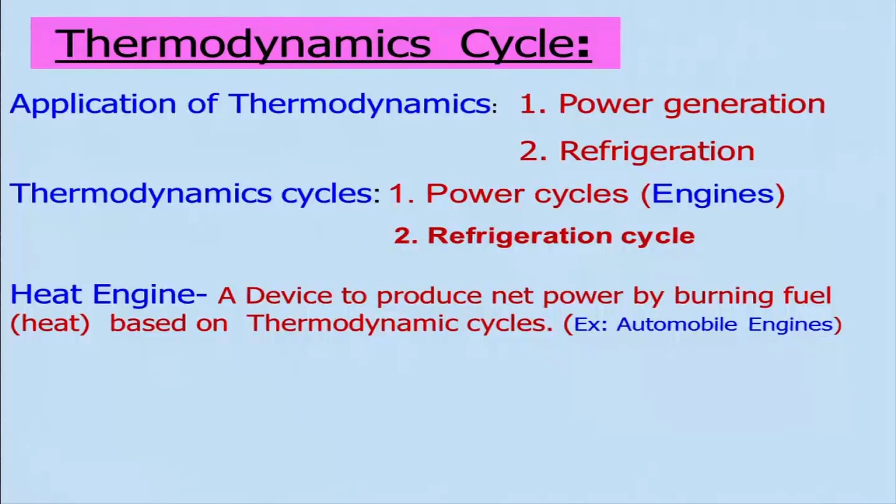These are heat engines, a device to produce net power by burning off fuels - it may be fossil fuel, it may be nuclear kind of fuels. Basically you will be generating heat, and that acts as the driving thing, and this will be best operated on thermodynamic cycles. We are basically considering combustion, that is the burning of fuel, and this combustion can be divided into two categories.

One is the internal combustion engine, the other is external combustion engine.

If you look at your automobile engine, is it an external combustion engine or internal combustion engine? Most of you might be riding your bike, which is powered by a heat engine. So what is that - is it internal combustion engine or external combustion?

What is the meaning of internal combustion engine? It is basically that the combustion or burning of fuel is an integral part of the engine. In an external combustion engine, you can burn some fuel which is not an integral part of the engine, so we call it an external combustion engine.

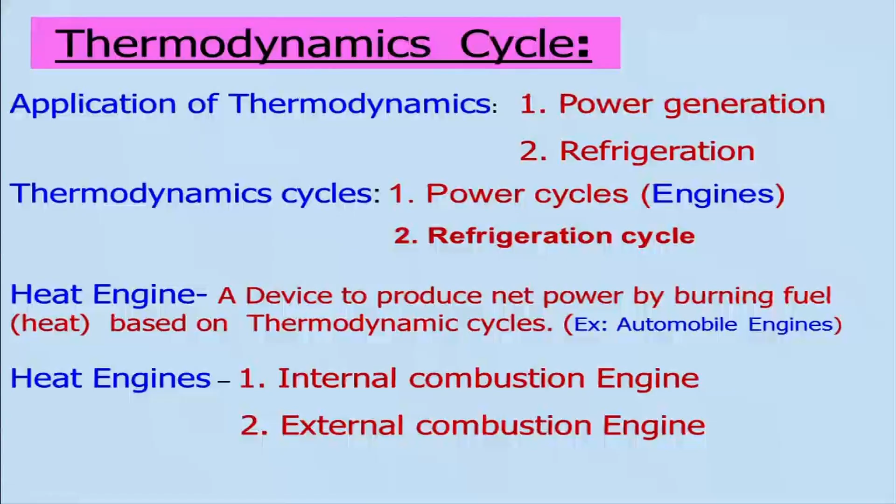If you look at the power cycle which generates power, it is not the cycle itself that generates power, it is the system operated on the thermodynamic cycle that produces the power. Therefore, we are labeling this cycle as a power cycle.

Power cycle can be broadly divided into two categories. One is vapor power cycle. As the name indicates, vapor will be produced in the process; it might be liquid, and then it will be converted into vapor, and again converted back into liquid form.

In another cycle, or heat engine, there is no need to have a phase change process, like gas working on it, as in your automobile engine. We take the fuel, and the liquid fuel is converted to gaseous form, but that is not quite the case here. You will be burning the fuel mixed with air, and working on that. We will be discussing the gas power cycle in detail, but now we will be discussing the vapor power cycle today.

When you talk about this power cycle, it can be broadly categorized into two again, based on whether it is a closed cycle or open cycle.

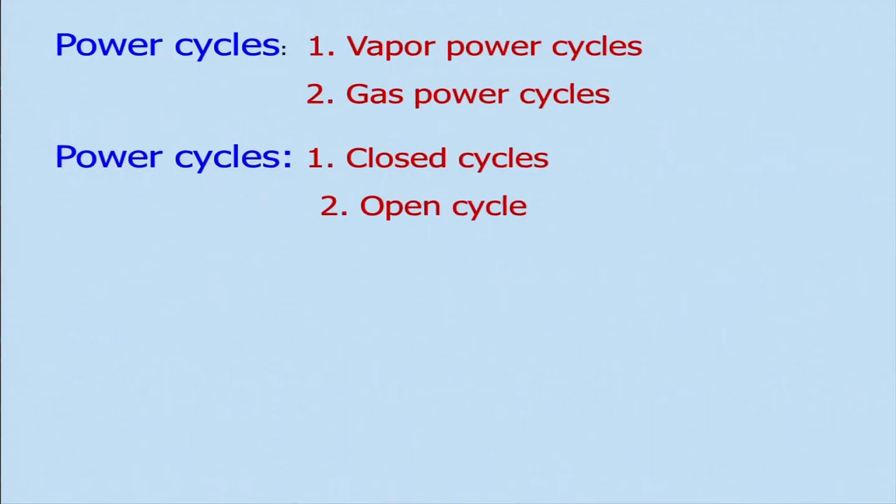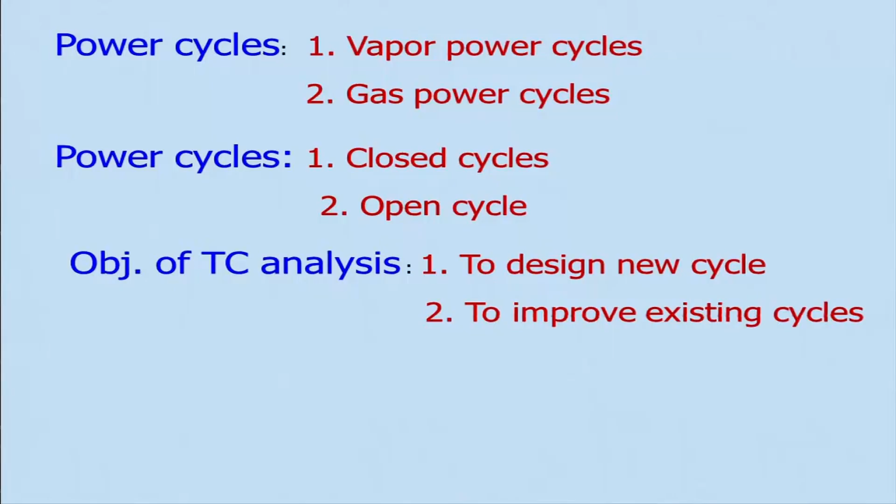We need to discuss those things, and our objective is to analyze the thermodynamic cycle in twofold. One is to design a new cycle, suppose I am not happy with the cycle and want to improve that, or another is to improve the existing cycles, because as we had seen in the last few lectures, we are interested to find out second law efficiency to identify irreversibilities, so that we pinpoint those things and try to minimize the irreversibility, so we can improve the efficiency of a system, an engine or a refrigerator or any other thing.

As I told, the main interest in thermodynamic cycles is to determine the thermal efficiency, because that will tell you how good the cycle is, or how good the engine or refrigeration system is. We will also need to look at other performance parameters, like second law efficiency we saw in the last lecture, so we know to what extent we can achieve performance. Otherwise you may be thinking you want to achieve something but it is not possible, so you should know the limit.

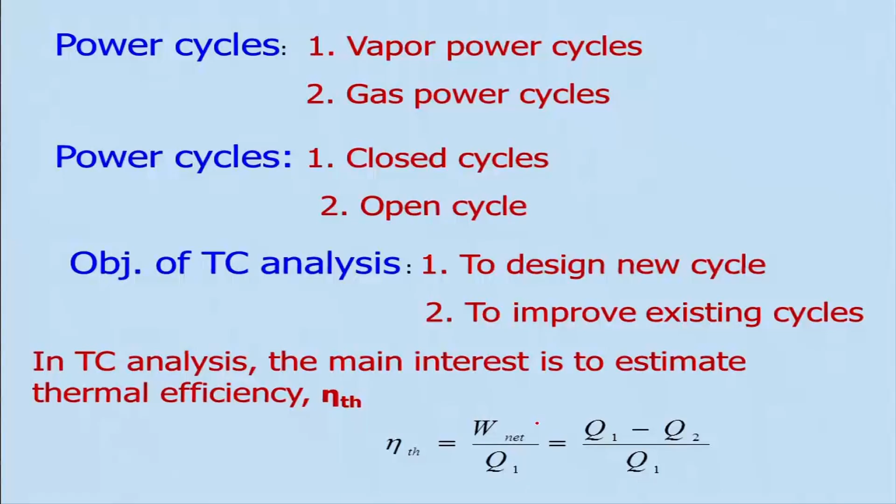The thermal efficiency is basically the net work output divided by Q-in, Q1. Q1 is the amount of heat absorbed by the heat engine from the source, the high temperature thermal reservoir. Q2 is the amount of heat rejected into the sink. So this is what we will be using for analyzing this thermodynamic cycle.

Now we will be discussing vapor power cycles, and the steam power plant is operated based on that. We may think about what other fluids one can use. Steam power plants are used profusely, not only in our country but in other places. We depend on coal for generating power, and steam power plants are used, something around 70 to 75 percent of total power generation. Earlier it was 90% of power generated by burning coal.

So there is a lot of scope for that, but what I was asking is a little different. Is there any other fluid which can be used in vapor power cycles? Any idea? Now one has to look at the properties. Suppose except water, can we use some other fluid? What are the other fluids that come into picture? Any idea? No idea.

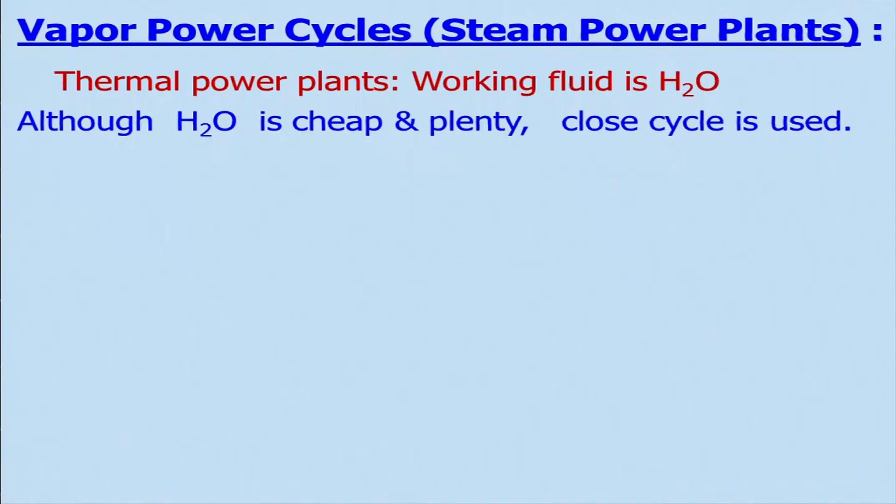So the working fluid is water, and although water is available plentifully, abundantly, is it so? It is, if you look at it that way compared to other things, and it is quite cheap. Of course it is getting costlier day by day, which is artificial in nature. But then we use it as a closed cycle. If I use mercury for generating power, then I cannot afford to make it an open cycle.

Why? Because it is toxic, and it has a lot of problems, and it will cause a lot of disease also. So, whereas we use basically closed cycle for steam power plant.

Why is it so? This is just a very different kind of thing, right? Can anybody tell me any idea? Because we are using water. I mean, we can just take some water, produce steam, and then after that dump it somewhere, like your automobile engines. We get some power and then leave it as it is.

But we do not do that because steam power plants require a large quantity of pure water. If you look at the water, you might be knowing, particularly the water in IIT Kanpur is having a lot of solid content of minerals, right?

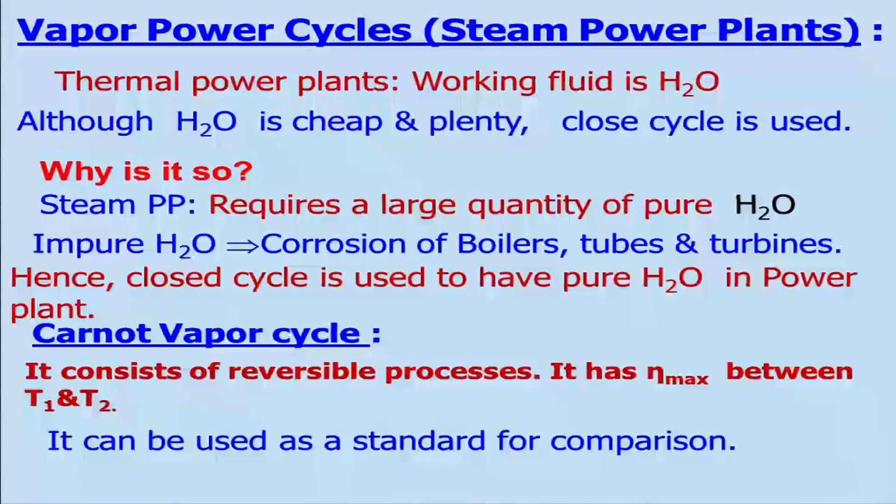So, let us look at basically the Carnot vapor cycle, because the Carnot is the reference cycle one can have. If you recall, it consists of reversible processes, basically 4 processes: 2 isothermal processes and 2 isentropic processes. And it has maximum efficiency when operated between high temperature T1 and low temperature T2. So, it can be used as a standard for comparison, to see whether we could achieve that or not.

So, let us look at a typical vapor power system, which will be having a boiler, where you boil the water and produce steam, giving a certain amount of heat Q1, which is basically from burning the fuel, and that heat will be transferred to the boiler. It is external combustion. The fluid is going through the tubes.

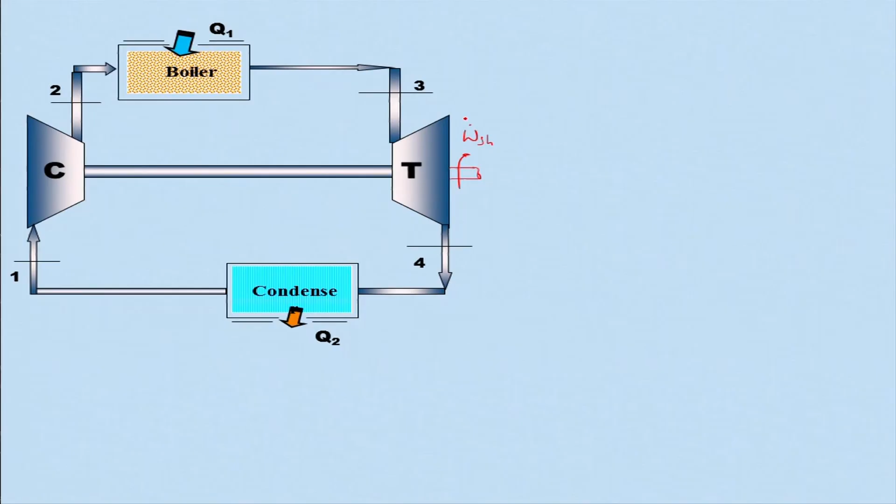And then this steam will be expanded in a turbine, and of course it has to produce some amount of work, like the shaft work which is produced. And of course, you can connect this turbine to a genset and produce electricity.

And then in the condenser, when this fluid goes through it, it will be rejecting heat, let us say Q2 amount of it. And then what you will have to do is compress it such that it can go to the higher pressure, and then it will come back to that.

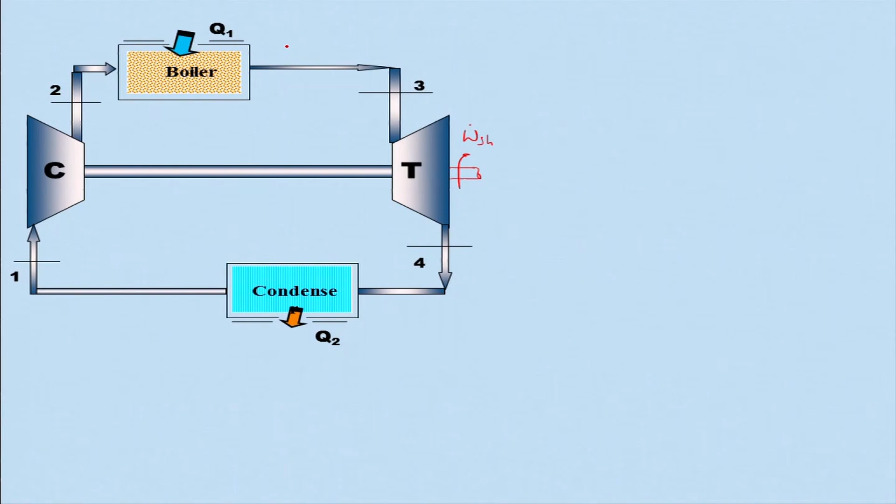So, if you look at the processes, from 2 to 3 a certain amount of heat is being taken by the fluid from the boiler, and then it is expanded, ideally, from 3 to 4, where entropy is remaining constant isentropically. Then heat is rejected from 4 to 1, and 1 to 2 is your compression process.

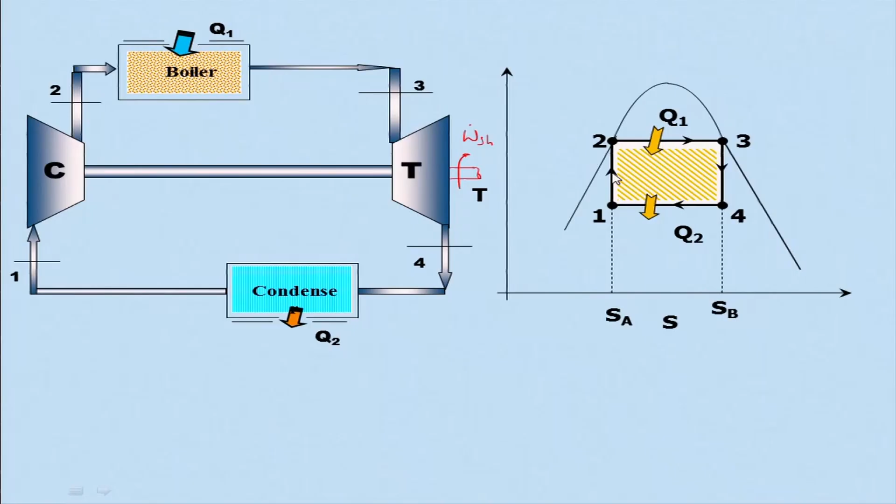So this is your expansion process, and it is isentropic, as I told, entropy remains constant in this process. This is your compression, again isentropic. This is heat addition, 2 to 3, and heat rejection is 4 to 1, where temperature remains constant - this is isothermal heat rejection, and heat addition is also isothermal in the Carnot cycle.

Now, let's look at the problems we face if we use the Carnot cycle. Of course, there will not be any problem for heat addition, because if the phase change process is taking place and you keep pressure constant, the temperature automatically remains constant. Similarly for heat rejection, there will not be much problem keeping the temperature constant in a practical sense, as the two phase flow is occurring.

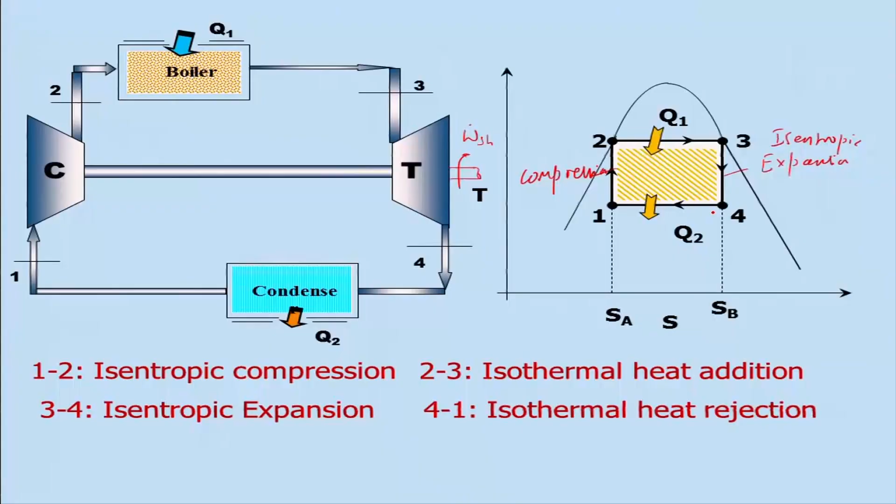But if you look at what the quality will be at state 4 of the steam, will it be 1, or 0, or in between? It will be in between, because of two phase flow. And for expanding the steam in two phase flow, it is very difficult, and it may also corrode the blades because two phase flow is difficult to handle.

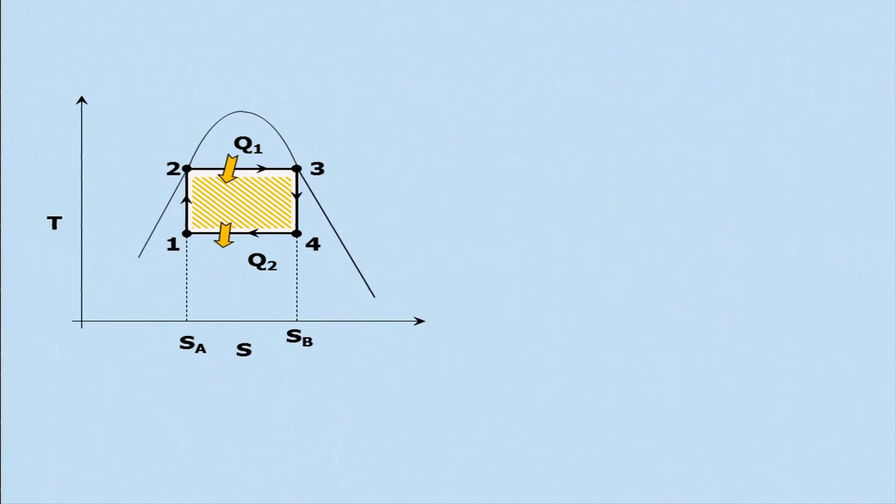Similarly, there is a problem with compression also. So if you look at how to overcome these problems, one can think of solving them. How can we solve these problems? We can think of this: compression, if we can manage to have it in the superheated region.

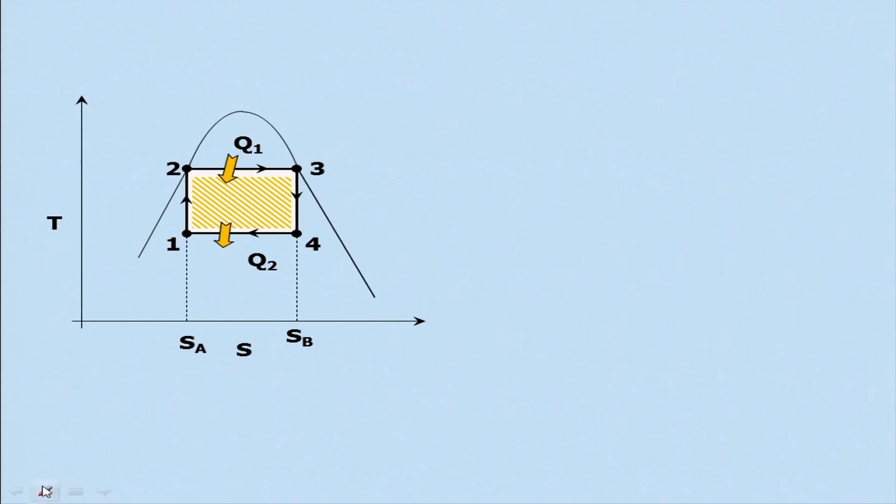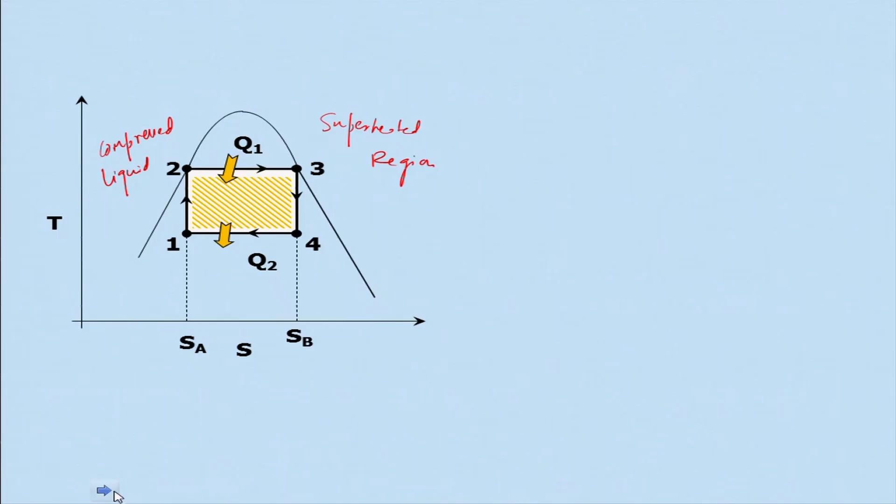This is your superheated region, isn't it? And then this portion is your compressed liquid. So if you do that, then you are handling a single phase fluid, and the problem may be solved.

So we can think that we add heat here from 2 to 3, and then expand from this superheated region till the saturated vapor region, 3 to 4. And of course, 4 to 1 there is no problem, because heat rejection can be done there. Then it is liquid at state 1, and you can compress the liquid very easily, as it's a single phase fluid. So that problem can be solved.

But if you look here, it is very difficult to control. For example, in the condenser, when heat is being rejected between state 4 and 1, to what extent will it be rejected? I can happily reject to the saturated liquid condition, but it can be here, it can be there, it can be anywhere in between. So then you cannot have control over the compression to a practical extent.

But in the modified version of this Carnot vapor cycle, you will also find a problem in the region between 2 to 3, because the pressure will not remain constant between state 2 to 3 in the modified Carnot cycle. This is your modified Carnot cycle.

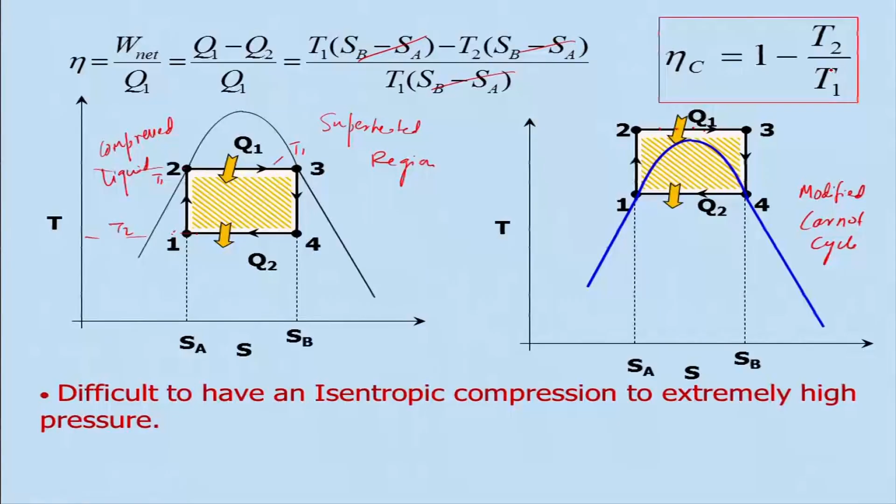So let's determine the thermal efficiency as W net by Q1. We know W net is Q1 minus Q2 divided by Q1, and Q1 is T1 times SB minus SA, where T1 is this temperature and T2 is this temperature. Q2 is T2 times SB minus SA. Divide by T1 times SB minus SA, and if you cancel this out, you get the Carnot efficiency equals 1 minus T2 by T1. As we've seen, it is dependent on the two temperatures: the sink temperature T2 and the source temperature T1.

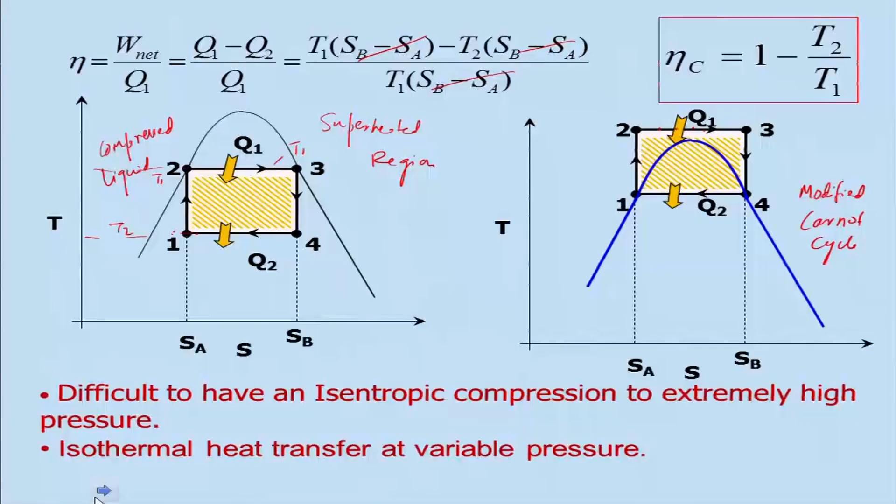So what happened, whether we can solve this problem, what we will do is instead of this compressor, we are basically replacing it with a pump. What is the difference between compressor and pump? Pump generally handles liquid, like we use water pump and other things. The cycle is similar in nature - there is a boiler component, a turbine, a condenser, only instead of compressor we are replacing with the pump.

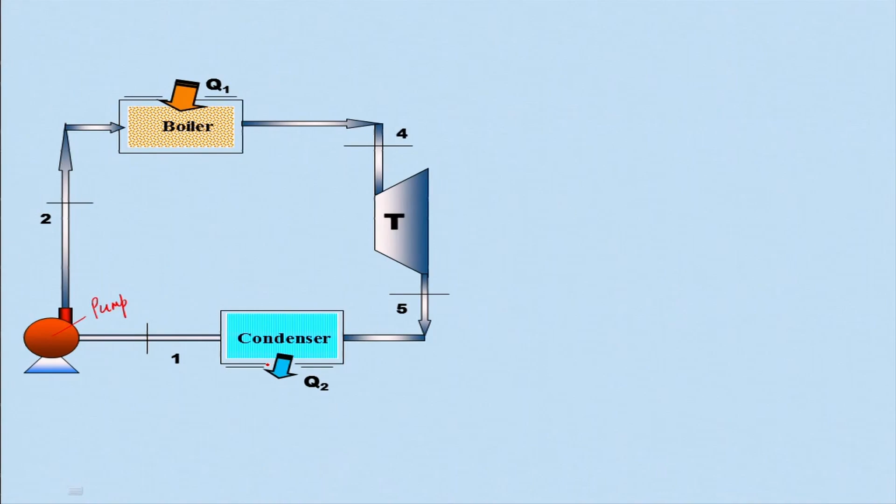That indicates that in the condenser the liquid will come to the saturated point from the vapor, it will be coming to the saturated liquid point. That means all the liquid, there is no vapor as such. And this cycle is basically modified by W.J. Rankine, and that is why you call this modified cycle as the Rankine cycle.

So if you look at the process, what are we doing? We are retaining the same heat addition from 3 to 4, that is constant pressure and also isothermal heat addition, temperature remaining constant. And it is being expanded from 4 to 5, that is isentropic expansion we are considering. This is the ideal one, in actual it will be different.

And then heat is rejected from 5 to 1 till it is saturated liquid, only liquid. That means X in this case, X1 will be 0, quality of the steam will be 0. And therefore it is only liquid, and then 1 to 2 is nothing but your pump work. And then of course heat addition, it is 2 to 3 - this will be sensible heating, and then 3 to 4 will be constant pressure heat addition.

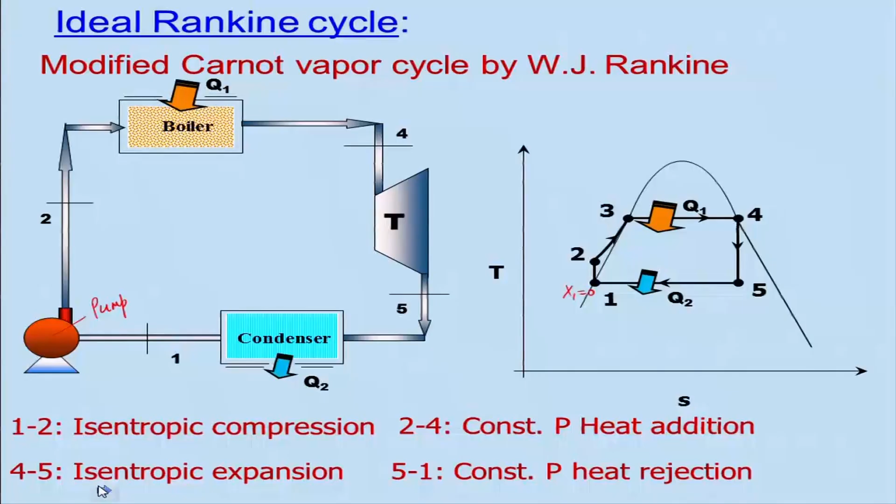So this cycle is basically known as the Rankine cycle, as I told, and it was devised by him, and this is basically what we call the ideal Rankine cycle, because the processes are isentropic. In real situation it will not be, both for the expansion between station 4 to 5 in the turbine and from station 1 to 2 in the pump. It is isentropic, which is not possible in reality. Therefore we are calling it an ideal Rankine cycle.

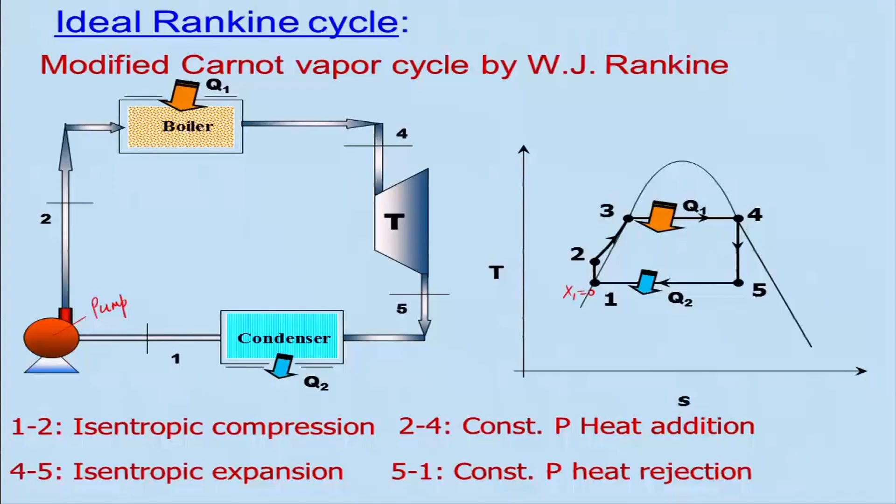And let us look at what problems we will be facing here. If you consider 4 to 5, X4 will be 1, but X is the quality of the steam, and X5 will be lower than that. That means if you look here, this is your saturated state, this region where X will be 1, but here it is less than 1. That means if X is less than 1, then more moisture will be there.

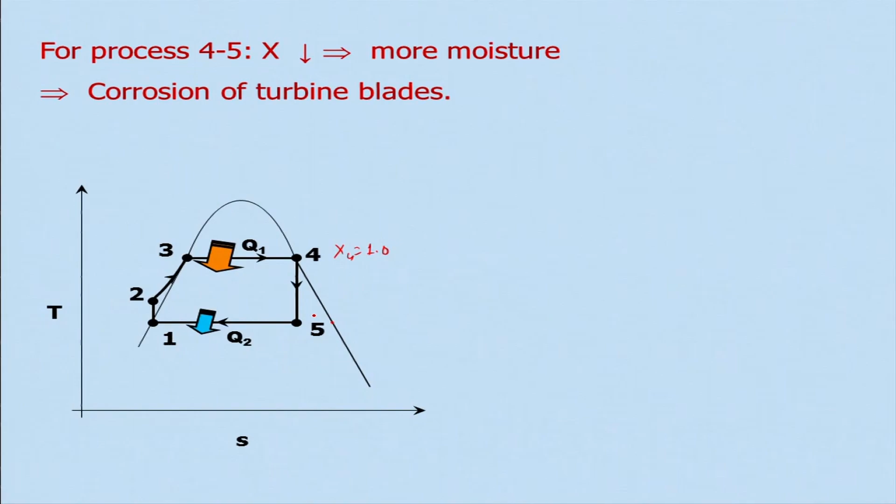If more moisture is there, that means it will be corroding the turbine blades. Generally, a quality of 0.9, or 10% moisture in the steam, is tolerable for a turbine, but more than that, quality less than 0.9 is not advisable, generally it is not being used.

So to avoid this problem of having higher moisture content, we can use superheated steam. Then how do we go about it? Instead of heating here, what I will do is heat it further here and then expand it, so that is what we will be doing. So instead of saturated conditions, we are superheating it to a higher temperature and then expanding, so that you get lower moisture content. That way we can overcome this problem by superheating the steam further.

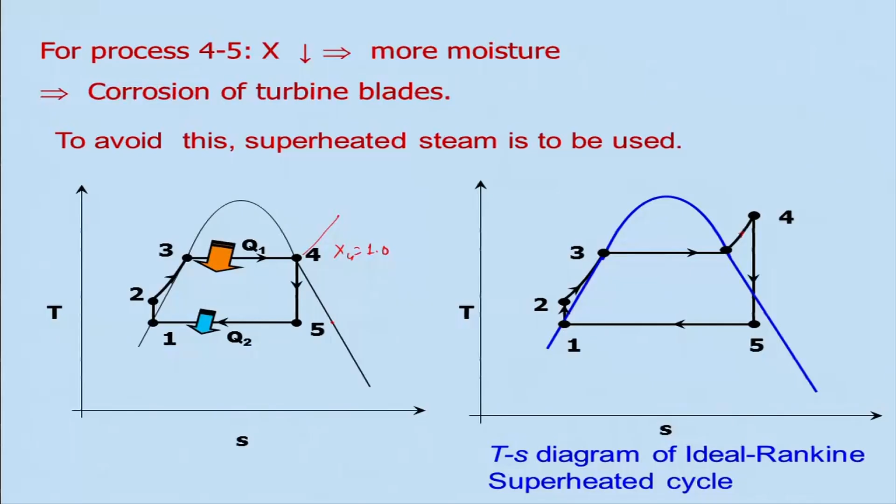Therefore, what we get in modern boilers is the superheated boiler, meaning it can produce superheated steam, and this is known as the superheated Rankine cycle. And this is also an ideal process, because the processes in the turbine and the pump are considered isentropic.

So, we need to analyze this, the things we will be doing: we will learn how to analyze each component, and we will be applying the first law of thermodynamics to the boiler and condenser.

If you look at the boiler in this part, that is 2 to 4 is your boiler, yes? This is the heat added, so this is your Q in.

So, the Q in will be basically H4 minus H2. How have we arrived at this? We consider the boiler as a control volume system, and the assumption we make here is steady state, and the change in kinetic energy and potential energy is 0.

Steady state, change in kinetic energy is 0 and change in potential energy is 0. And then what else? There is no shaft work, shaft work is 0. So then we land in getting Q in is equal to H4 minus H2.

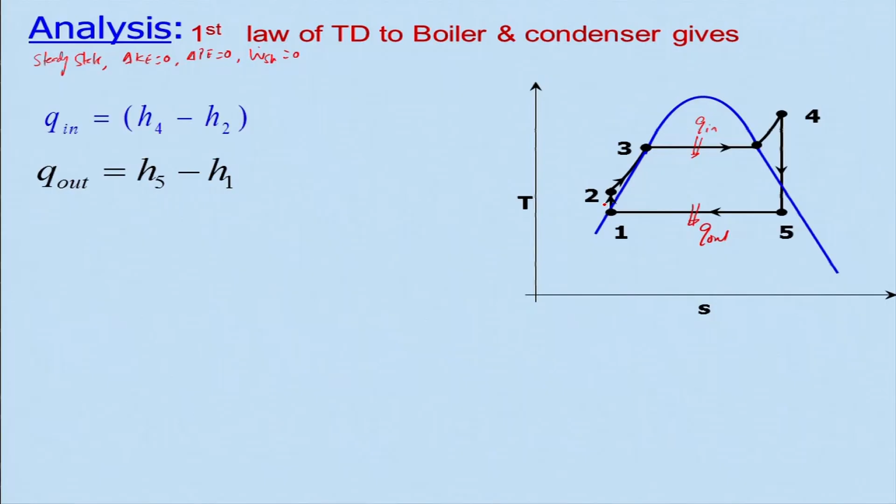So similarly, Q out, what would it be? It will be H5 minus H1. In the similar fashion, we can derive this from the first law of thermodynamics for a control volume. Is that clear to you?

So what can we get? We can get the thermal efficiency, basically W net divided by Q in. Keep in mind this could have been the small one, that is the work done per unit mass. If you look at this unit, this will be kilojoule per kg.

And the thermal efficiency will be Q in minus Q out divided by Q in. And what is Q in? We have already seen it's H4 minus H2, and Q out is H5 minus H1, divided by H4 minus H2, that is your Q in.

And the net work done will be basically: the work done here is W T, and this work which is going out, you are supplying it, this is W P, the pump work, and this is your turbine. So H4 minus H5, that is the change in enthalpy, minus H2 minus H1, the change in enthalpy in the pump. That is the net work which the power plant will be producing.

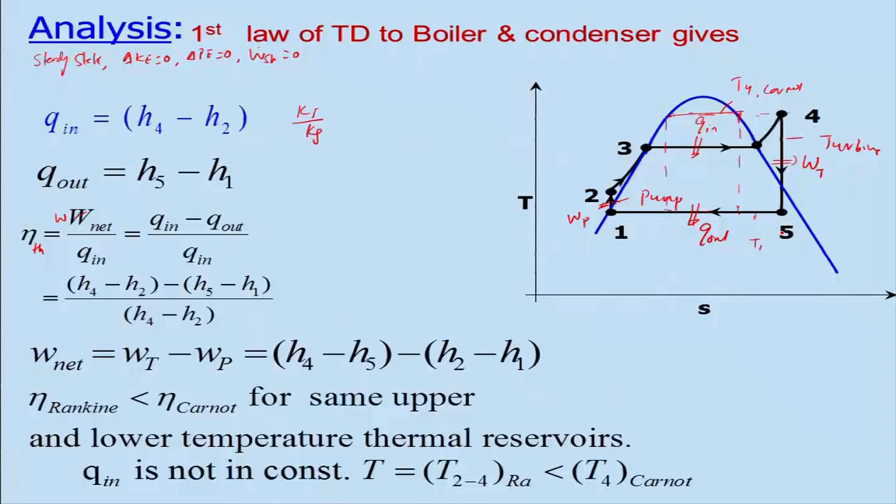If I look at the Carnot cycle, let me just draw it, maybe it will help you visualize. So that will be my Carnot cycle, this is my Carnot cycle. It will go from here to there and then do that. So the temperature here, this T4 for Carnot, and this can be considered as T1, temperature T1 for the Carnot. So therefore, the efficiency of the Rankine cycle will be lower than the Carnot cycle.

So we will take an example just to find out how we can work on that.

This example is about a thermal power plant which is operated on an ideal Rankine cycle with a steam mass flow rate of 10 kg per second. Water is fed to the boiler at 50 bar, quite a bit of pressure, and enters the condenser as saturated liquid at 0.1 bar, 1 atmosphere pressure.

So you are operating at basically 1/10th of that, and the mass flow rate of cooling water through the condenser is 500 kg per second, which enters at 30 degree Celsius and leaves at 40 degree Celsius, that means a 10 degree Celsius difference. We will have to estimate the temperature at which steam enters the turbine, the thermal efficiency of the power plant, and of course the power output of the turbine.

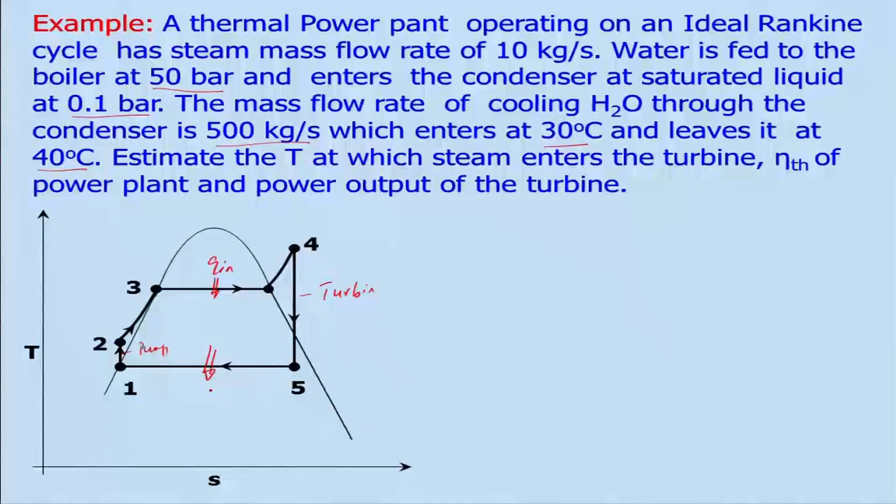So these are the cycles being used for this analysis, ideal case we are considering. 1 to 2 is the pump work - this is your pump, and 4 to 5 is your turbine expansion, with Q in and Q out. So 2 to 4 is your boiler and 5 to 1 is your condenser.

So what are the things given? For the condenser, cooling flow rate is 500 kg per second, and mass flow rate of the steam or water in the closed cycle is 10 kg per second. We know that P2 equals P3 equals P4, because this is the constant pressure line, at 50 bar, and this is at 0.1 bar pressure. P1 equals P5 equals 0.1 bar.

And the coolant inlet temperature is 30 degree Celsius and coolant exit temperature is 40 degree Celsius for the condenser. These two are for the condenser.

So we will have to find out T4, and we will also have to find out the thermal efficiency and how much work is being produced by the turbine. That will depend. We want to find out efficiency also - we will have to find out efficiency.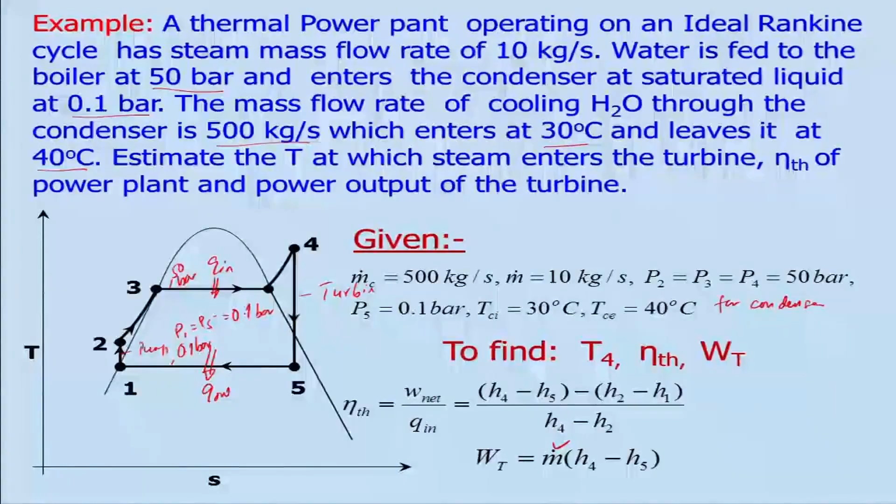Can we find out these 2 points? I can find out, because we have given this temperature 30 degree Celsius and 40 degree Celsius, and from the steam table at water 30 degree Celsius we can find out that HF is 125 kilojoule per kg, and for water at 40 degree Celsius we can get HF as 167.45 kilojoule per kg from the saturated steam table.

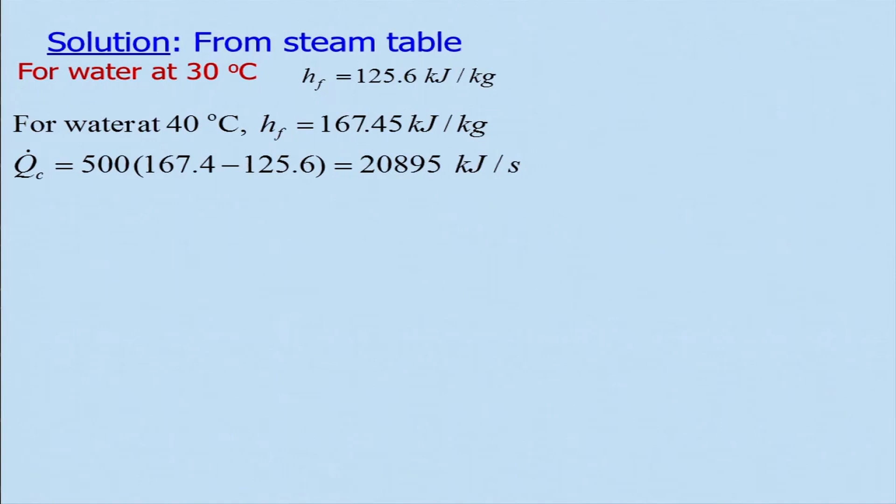And we have given that Q dot C, that is the coolant used for the condenser, is 500 kg per second, and multiplying this by HF at 40 degree Celsius minus HF at 30 degree Celsius, I will get this amount of heat, in kilojoule per second. This is kilojoule per kg and this is kg per second. So therefore I am getting this much power or heat will be extracted in the condenser.

So the energy rejected by the mass of working fluid, what would it be? Q out - what would it be? This will be Q dot C divided by the mass flow rate of the steam, which is 10 kg per second. So that is nothing but 20,895 divided by mass flow rate of steam, that will give me 2089.5.

Right, per kilo. What will be the unit? This will be kilojoule per kg. Yes or no? Because this is kilojoule per second and this is kg per second, 10. This unit will be kilojoule per second and this is kg per second, so the second will cancel out and you will get kilojoule per kg here.

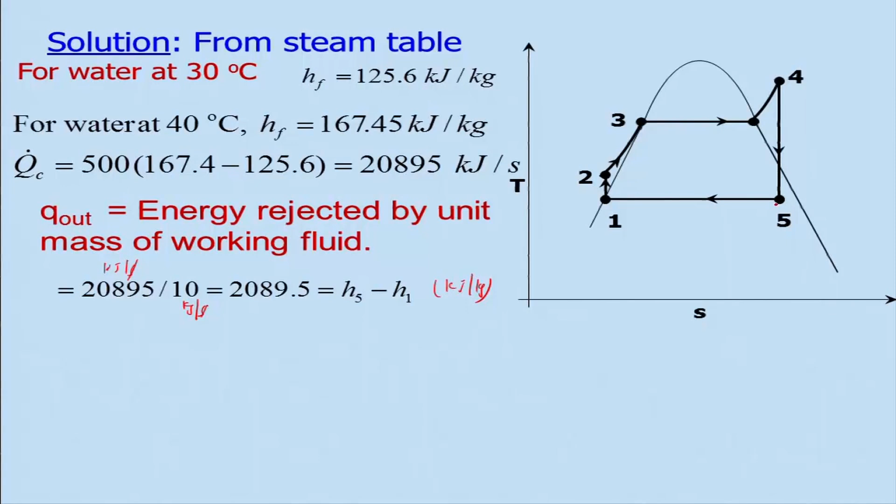And that is equal to H5 minus H1. So we know this, we can get these properties at H1 very easily from the saturated steam table, and H5 we know from this. As I told just now, the saturated liquid at 0.1 bar, from the steam table we get HF equal to 191.83 kilojoule per kg, and that is nothing but H1. So if I know this H1 and if I know this, then I can get very easily the H5, and we will do that.

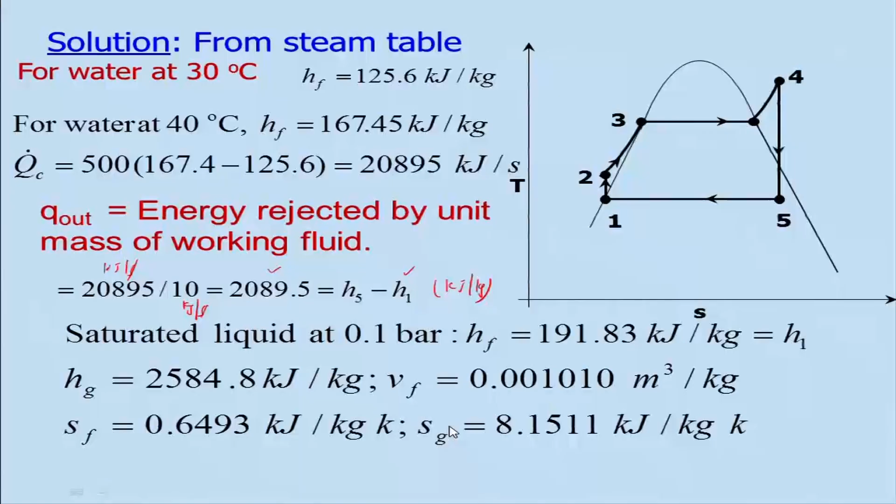And of course, we need to know these properties like Hg, Vf, Sf, Sg - all those things we should get the data. As I told earlier, we know H5 minus H1, that is equal to 2089.5 kilojoule per kg, and H1 already we got from the steam table. So this is known, and we can find out H5.

H5 is equal to 2283.3 kilojoule per kg. So now I know what is H5 here. At this point I know H5, okay. And whether it is possible to calculate that, we will see.

By knowing this H5, I can calculate what will be X5, X is your quality. Why do I need to find out quality here? Is it required or not? Because I do not know this point, okay, I need to find out this.

In a general problem, what it could have given is the pressure, which is already given, and for the superheated steam you have not given the temperature. So, if temperature is given, then this point is your superheated steam.

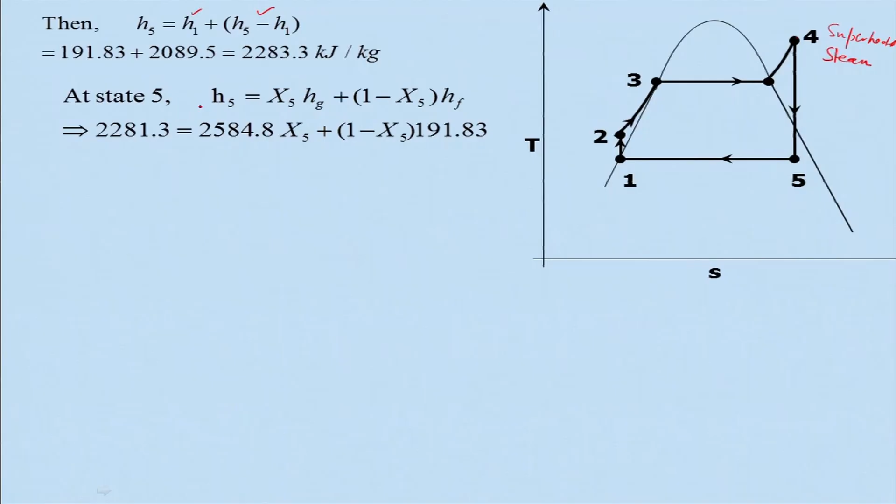So therefore you need to find out that. H5 is known, Hg is already from the steam table, and Hf is known from the steam table. You can substitute these values and get X5 as 0.8732, which you can approximate as 0.87.

And then I will have to find out entropy. I can find out S5, entropy is 7.19 kilojoule per kg Kelvin, because I know this Sf and I know this Sg, I know X5, and then I will substitute those values and get that.

As I told, we are very much interested to find out this point, because the entropy will be remaining same, that is S5 is equal to S4, because this is isentropic expansion. So therefore S4 is equal to S5. So we will be using that condition.

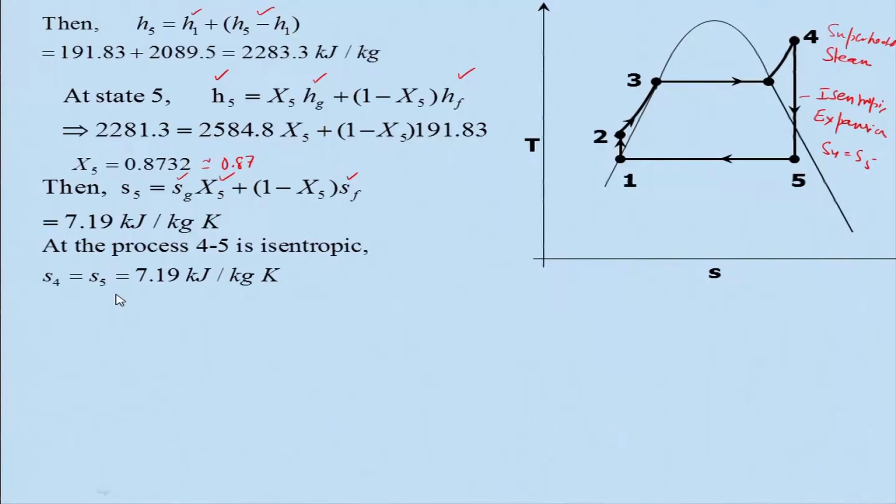If you look at this, S4 and S5 - S4 is equal to 7.19 kilojoule per kg Kelvin, okay. Are you getting? So therefore we are now very sure that this is a superheated steam.

See, in the problem it is not given that it will be superheated, am I right? Yes or no? It is not given as a superheated steam, right. But however, now we will find that S5 is greater than Sg. Therefore, it is superheated steam.

So this will fall between, then you will have to find out temperature. Temperature is 500 to 600 degrees Celsius. You will find out this entropy is coming, that is 7.19 kilojoule per kg, and you will have to do an interpolation and then get those values.

By interpolation, if you look at, I will get this - that is your 500 to 600 degree Celsius. For 500, this will be the entropy, and then you will have to find out this entropy and this one, and you will find out the delta T is basically 79.4 degree Celsius, and then T4 will be 579.4 degree Celsius.

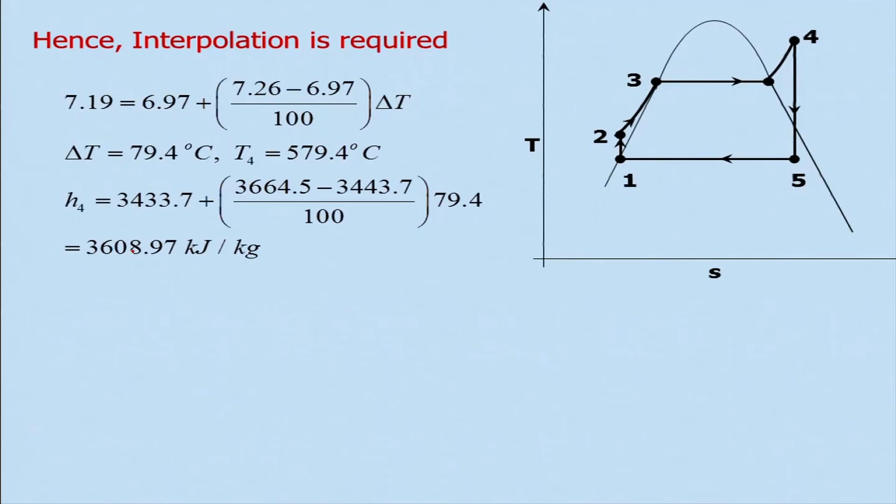By knowing this one, then one can calculate what will be H4 in a similar manner, because you know the enthalpy at two different temperatures, 500 and 600 degree Celsius. Therefore, you can get H4 is 3608.97 kilojoule per kg.

And of course, the work done in the pump is H2 minus H1, which is nothing but V into delta P. This is your specific volume.

Volume at what point? At station 1, right. This is basically V1 into delta P, how much will it be? Delta P will be, this is 0.1 bar, and this is your 50 bar.

So that will give me the work done on the pump, or work input into the pump. If you look at the specific volume, it is very low, and this V1 corresponds to the saturated liquid conditions, which you can get as Vf1 from the steam table corresponding to 0.1 bar. So you can note one thing, this is a very small value, 5.04 kilojoule per kg, right.

And of course, you can find out what will be H2, because we need to find out H2, and because we will have to find out thermal efficiency, that is your Q in, and I will have to find out Q out, which is nothing but your net work. You can think of that as H4 minus H5, the change in enthalpy between the states.

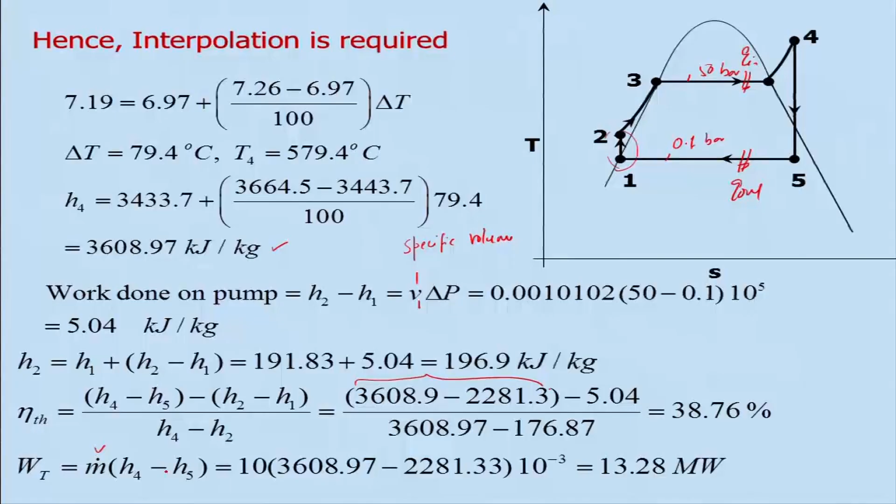If you look at the back work ratio, which we had defined, that is how much power is consumed by the pump compared to the power produced by the turbine, Br equals Wp by Wt, and if you put that in, it is very small. We will see for other power plants it is a very sizable amount. That is the beauty of the steam power plant, that work input to the pump is negligibly small.

So if the steam is produced from a constant thermal reservoir at 600 degrees Celsius, we need to find out the second law efficiency. The second law efficiency is basically the net work done divided by the reversible work, which we have already seen as Q in into 1 minus Th by TL.

Actually it should be the other way around, it will be TL by Th. So that is basically Q in into 1 minus TL by Th, and this is nothing but your Carnot efficiency, if you look at it that way. When you substitute that, you get 59.1 percent as the second law efficiency.

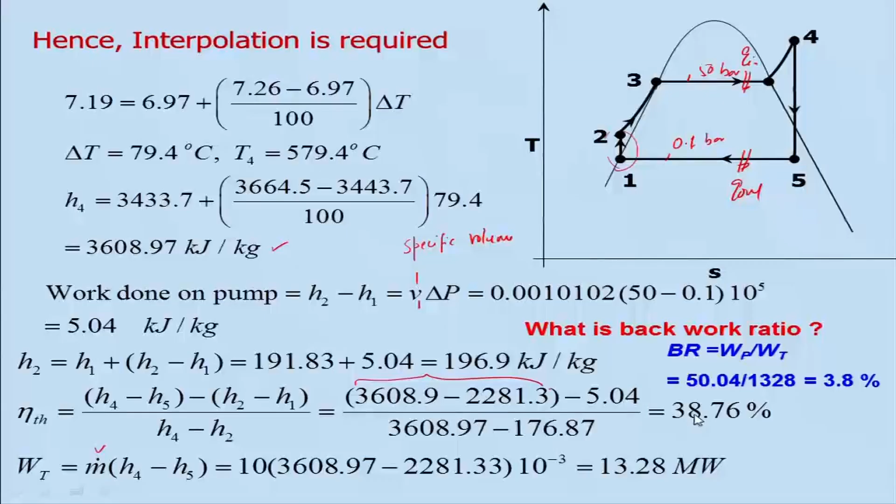What was the first law efficiency? Can you just look at your notes and tell me? It will be something around 38 percent, right? 38.76% is the first law efficiency, and the second law efficiency is basically 59.1 percent.

That means there is a lot of scope to improve the efficiency of this power plant. Of course, we are considering ideal conditions, but still there is scope for improving from 38.76 to 59.1.

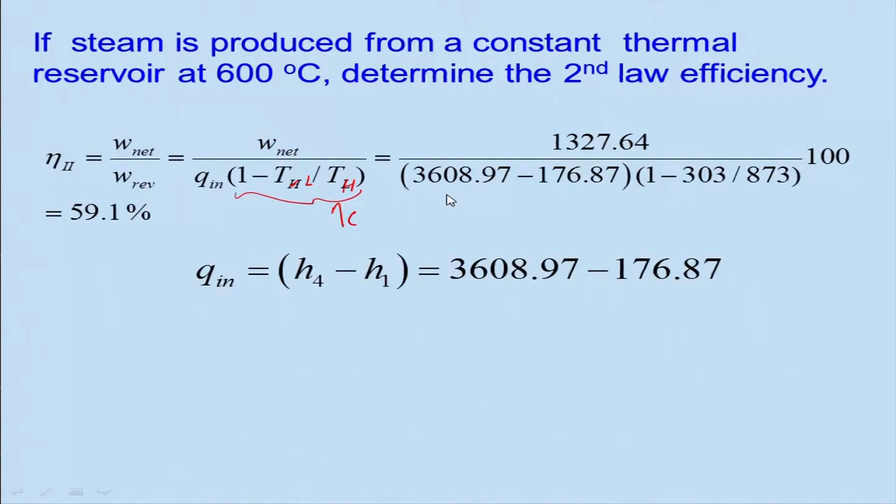So, if you look at this Q in, one can find out H4 minus H1, and that we have already done, and then you can find out the efficiency. So we will stop over here, and in the next lecture we will be discussing other aspects of the Rankine cycle.